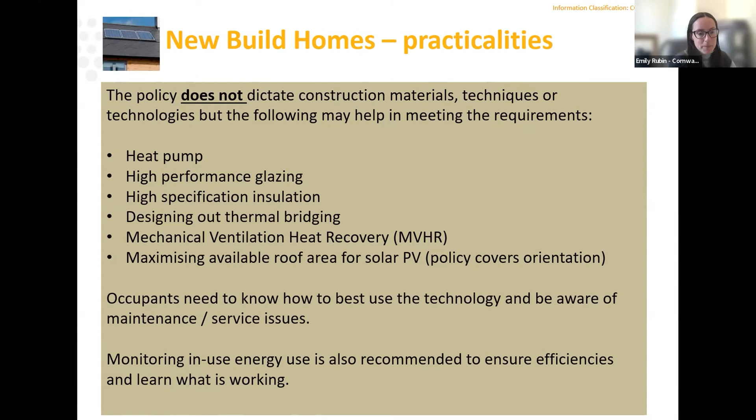So it's also really important that occupants know how to use the technology that they're given, and be aware of the maintenance and services issues there. And we also would really encourage monitoring the in-use energy, just to see what's working, and learn from that, and if there's any adjustments that can be made.

So just briefly touch on the non-residential requirement, and that is for larger developments to achieve BREEAM Excellent, which is a more flexible framework to cover all the different uses that could be caught up in that. So retrofitting, often planning permission isn't needed for adaptations to homes, but where it is, we will give significant weight to improvements where energy efficiency and reduction in carbon emissions are able to be made.

There is support for solar panels, especially where they minimise visual impact, especially to heritage assets and landscapes. And the policy also supports improvements to climate change resilience and sustainability of heritage assets, where they conserve or enhance the historical significance, and they facilitate the sensitive reuse where they're in disrepair. So that's really saying that these changes can really help the future of heritage assets. It's a positive thing.

So further requirements is also a not particularly onerous water demand threshold there for all new dwellings. We weren't able to have anything lower than that because we're not in an area of water stress. And then for large developments, some water efficiency measures as well there. And there's also provision for prioritising previously developed land and reusing existing buildings, and careful use of soil and resources, using locally distinctive materials which are resilient to Cornwall's climate, sort of granite and slate, things like that, as is appropriate to that area.

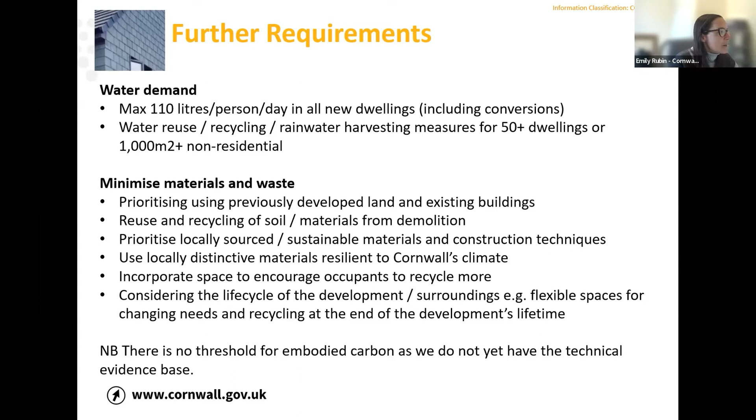So if you want to know more, some links I mentioned, we've got the climate change DPD link there. It's got the latest draft, it's got the evidence, and we'll have updates on the examination shortly. I've got the Cornwall Design Guide, which was adopted at the end of last year, and that sets out further details on our expectations. And it covers all sorts of things: inside buildings, outside buildings, public spaces, access.

Another imminent document is a plan for our places. This comes under the Prosperous Cornwall 2050 stream of work that we've got, and it's a very high level long-term strategy for the next 30 years. It does include the importance of energy efficiency, and this document's really going to set the tone for our next local plan, which we're starting to think about. It covers lots of different topics as well, so it relates to transport, economy, all sorts of things.

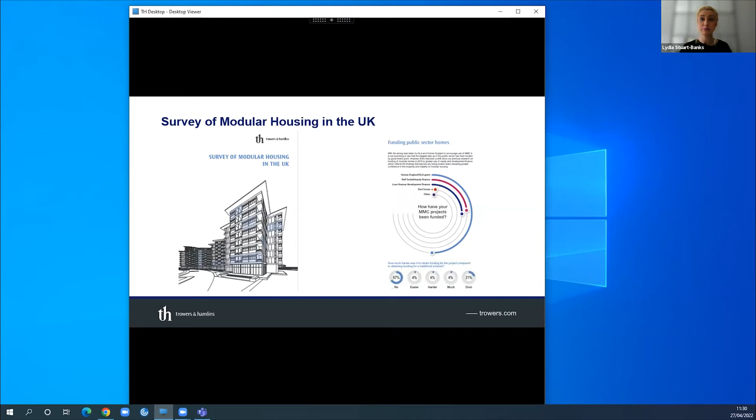And then in our latest report, which we published in March this year, we found that build quality and costs are among the key drivers across the public and private sectors. The need for less labour when building with volumetric and panelised systems was also a motivator. And that isn't a surprise given the construction industry is facing this skills and labour shortage. Equally, the argument for sustainable development and energy efficient homes is very high on the list as a driver for using MMC. So this undoubtedly reflects the increasing move towards and pressure for funders and developers to transition to net zero carbon. So our preliminary findings from our survey demonstrate an increasing appetite for using modular and demonstrated that parties across the housing sector are willing to consider innovative solutions to overcome some of the hurdles. But MMC is generally viewed more positively as an alternative to traditional build.

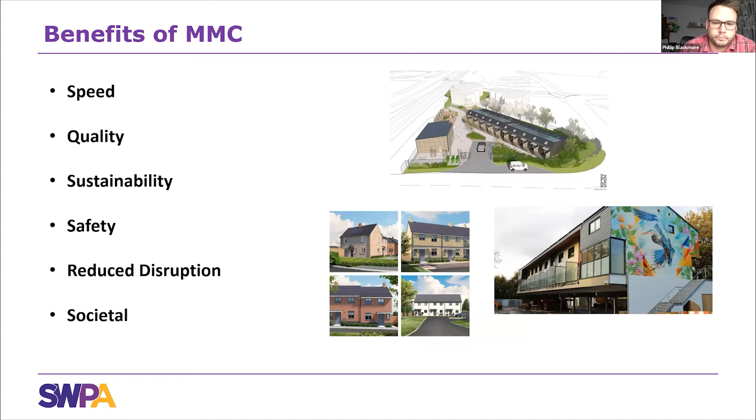So we're all aware of the most common perceived barriers to the adoption of MMC, including the perception of MMC being higher cost versus traditional, and the schemes having to be a certain size to make it viable, and also the uncertainty around quality of construction. It's also likely that public procurement in the UK has been a contributing factor to the blockage of MMC, so I'll just touch on some of those barriers now.

Supply chain resilience. So poor supply chain resilience can affect profitability and fundability of projects. In this regard, a fairly big barrier to the take-up of MMC is seen to relate to its lack of well-established supply chains. Recognising this was a major issue, back in 2017, I think, David Mosey developed and introduced the FAC1 Framework Alliance contract. The idea behind it is that it combines the features of a framework contract and an alliance contract to achieve a strategic and collaborative approach to procurement, connecting multiple projects, integrating team members, and improving value.

We believe that supply chain resilience starts from having a collaborative approach and focus on alliancing. And with the FAC1, this promotes an overarching theme which seeks to align objectives and interests. It promotes a joined up approach to achieving supply chain resilience.

Specifications. So legally, when drafting specifications for a preferred solution, the contracting authorities should not draft too narrowly or widely in order to rule out or unduly favour any potential workable solution which may meet its particular needs. So not knowing how to draft specifications for a new type of solution, or to draft them wide enough so as to not inadvertently discriminate against that new type of solution, may have been a barrier against the adoption of MMC in public procurement. The Construction Innovation Hub identified defining the need as one of the biggest obstacles to the growth of MMC solutions. This is now changing, with the creation of frameworks and dynamic purchasing systems which public bodies can opt into, and which effectively provide them with ready-made solutions.

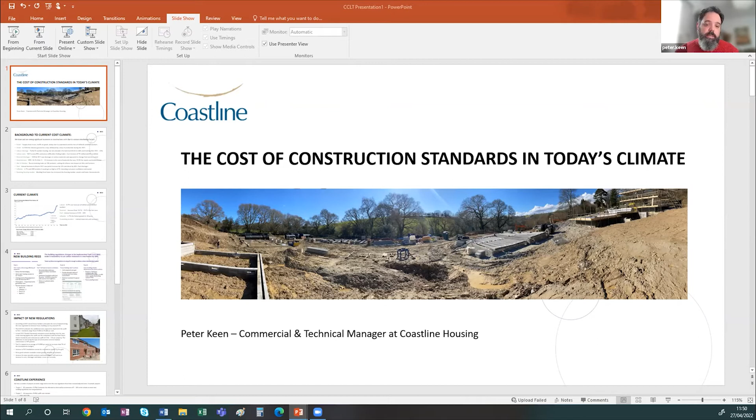You got the next slide? New building regs, does that come up? Yeah, sorry, yes, that's visible. Yeah. Sorry, my screen is different to yours. So no, that's right, new building regs.

We're on. Okay, so the building regulation changes that have been implemented from June this year make it mandatory to cut carbon emissions in new homes by 30%. And some people say, well, these are not going far enough. And I think it was opened up at the beginning that we are not going to be hitting this 1.5 degree increase at all. So we've got Part L, looking at energy efficiency in properties.

There's various different ways of doing that: thermal efficiency, so bridging, heating systems, etc., PVs, improving thermal U-values within the property. We've got Part F, which is looking at improving ventilation to reduce air pollution within properties. So using mechanical extract ventilation and MVHR, so heat recovery systems as well.

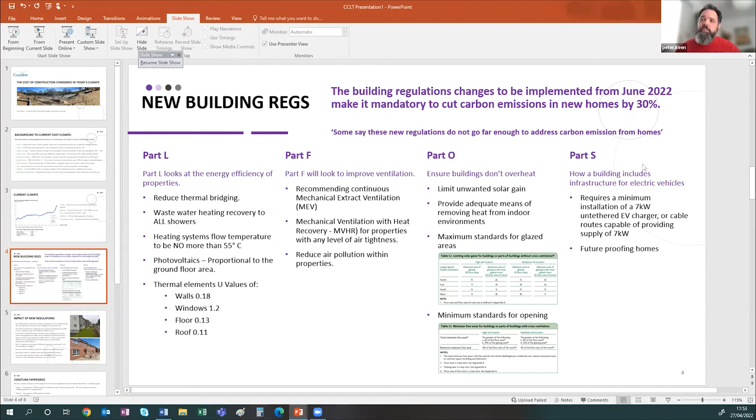Part O, ensuring we're not overheating. So getting rid of unwanted solar gain, how we can orientate properties better, standards for glazing, standards for openings as well. And then Part S as well, which is around infrastructure for electric vehicles, so requirements to have those installations within properties to future-proof.

Randall Simmonds, who we work with, did a review back in April 2021, and they were looking at the costs particularly around housing estates, so particularly what we do in terms of construction, and uplift costs to comply with new Future Homes Standards, etc. They estimate uplifts between £13,000 to £22,000 per property. The difference being the type of construction, so current modular construction versus SIPs panels, etc. Part S, so again, there's caps around that, but 3,600 per point.

We have noted, though, with regards to that, we have a site where it was discussed that electric vehicle charging points were to be installed in all properties. Now, that wasn't actually done in the end, but the grid came back and said, if everyone plugged their car in, we could not sustain it. And so the knock-on effects outside of whether the grid can provide that.

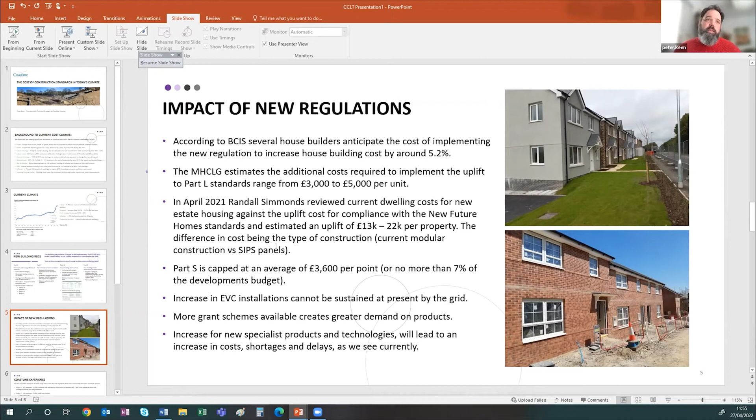There's more grants available, which is great, but also that creates demand. So people are wanting to upgrade their properties, and the increase in new specialist products and technologies, we have seen, leads to increased costs as well, shortages and delays on our projects. So just a couple of examples of our experience here.

So a number of projects we have at tender stage have now been reviewed because of the new regulations that are coming in. We've got one project there, which is 52 properties, 3.7 million. Contractors informed us that they're looking to increase the cost by 5 to 10% to meet the new building regulations, but this isn't guaranteed. They have said that could change depending on availability, demand, and the driving costs behind that, again, fuel availability, skills, etc.

With another project, 6.6 million, the uplift costs on those are a bit more specific around air source heat pumps. So 245k, underfloor heating; there's no point in really installing air source heat pumps unless you're doing underfloor heating with it. And then there's a whole load of works behind that to ensure that those lower emission energies are going to be more efficient within the property. We've got a smaller one, 25 properties, again, uplifts there. There's a review of ground source heat pumps, but also looking at PVs as well.

Another thing that we have opportunities to deal with is biodiversity net gain, and that's a requirement that we need at the planning permission stage to achieve 10%. The pressure we've seen is that it means we're building less homes per site, and also we're doing off-site contributions, so we're having to offset it because we can't meet that target. Again, that increases costs. I'm talking about money; I'm not saying these are bad things at all. These have financial impacts on us as house builders, and within our budgets as well.

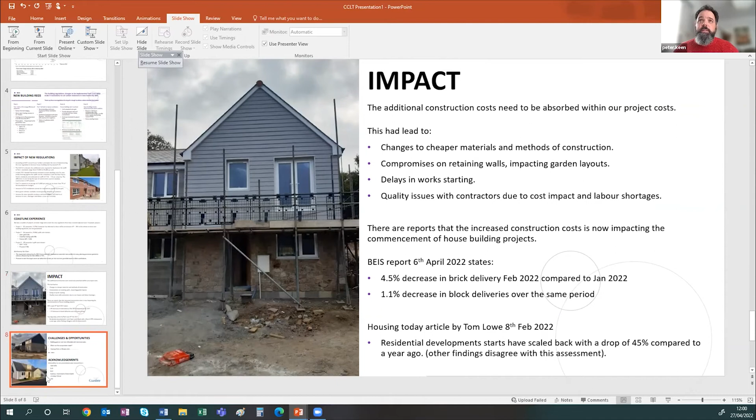And also there was an article just around residential developments, looking at some of the evidence that's coming out, scaling back, and they're seeing drops in sort of the start of projects. Now, other findings disagree with that, but that's certainly something we're aware of and we need to keep an eye on. And sort of finally, really, so these are challenges, but they're opportunities as well.

And building greener and more affordable with increased costs, we have to be a bit imaginative. We need help from all sectors. So it's great to hear about MMC. I think that's fantastic. Agree with that and want to work with that more. We need assistance from local authorities as well, planning groups, etc. So it's to help us in terms of what we're building and how we're building these, orientation of properties, etc., so we can really maximize PV.

We need to talk about and have conversations around where we make compromises in terms of construction and meeting. You know, we don't have a lot of choice around meeting regulations, but the type of properties we are constructing. And we have a housing crisis, but we also have a climate crisis at the same time. The two aren't mutually exclusive. And again, there's opportunities to address both and work together on both. There's some acknowledgements there at the bottom, but yeah.

No, thanks for that, Peter. That's really frank and honest, and really good to get a realistic view of what it's like on the front line of construction of affordable houses in Cornwall. I think lots of people will be nodding away in agreement with lots of the points you made. Again, if you could have a whiz through the chat just to see if there's any points you'd care to pick up on, I'd be grateful, because we're obviously running a little bit behind time again.

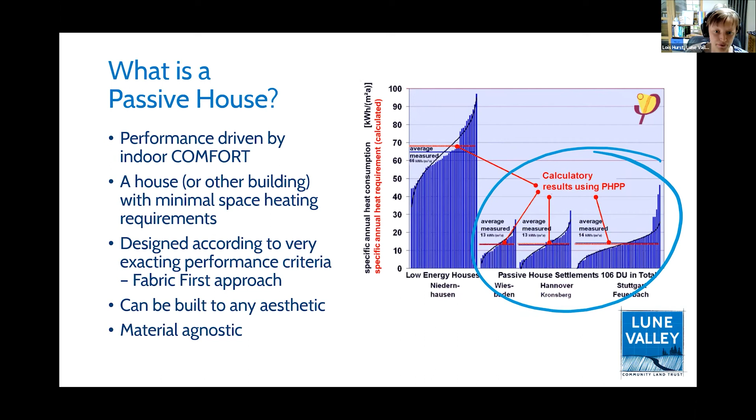So yeah, I'm going to go into a bit of detail about the things we need to consider when we're building passive house, and then relate them back to our experience with the Lune Valley CLT. So basically, we begin with optimized orientation and window sizing. South-facing glazing is best for solar gain in the winter, which corresponds to free heating, which is excellent. You have to be careful to avoid summer overheating, but south facing also provides us with the easiest opportunities to shade in the summer, which means we don't have to introduce energy consuming air conditioning.

We observe increased energy demand when we deviate from that south facing orientation. For example, if we have 30 degrees from south, then we see a 10% increase in energy demand, and it's actually up to 42% more if we orientate due east or west. And this is important. I'll come to this in a moment, but it doesn't mean that all passive houses have to face south. The other consideration is the window sizing.

Typically, we'd expect passive houses to have about 15% glazed area, which is apparently not uncommon in conventional buildings. But we're putting those windows, like I said, carefully orientated to gain the most solar gain. And then we have shading as well. We also want to be considerate to landscape shading and other buildings, etc.

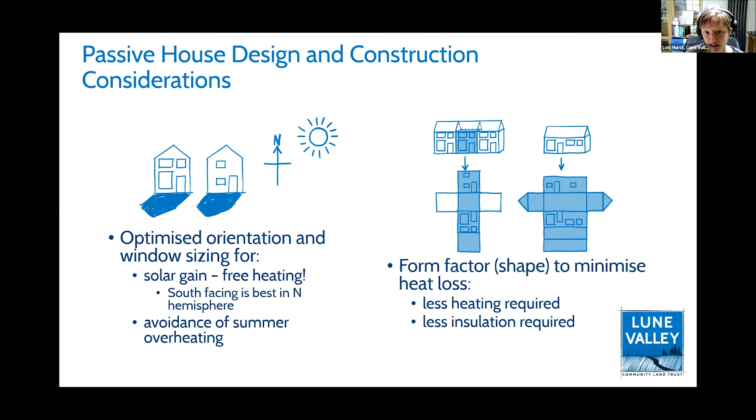Then on the right-hand side of this slide, we've got the form factor. So the shape of the building can make a tremendous difference to how much energy it consumes. You can see the example here is a terrace versus a bungalow. Basically, it's the amount of surface area that you have to the amount of treated floor area or thermal envelope that is functional space. Terraces are cheaper to build because there are fewer walls per house. You get shared walls between the houses, etc. So there are multiple benefits to giving good consideration to your form factor when you start off with your design.

Again, this was another constraint of the specification. The community were involved in deciding how we wanted these homes to look, and we decided that having a pedestrian street which ran between the homes made for a really nice community feature. So the homes don't face south, but we are still on track to meet the passive house standard in spite of that. So it's best to face south, but it's not imperative.

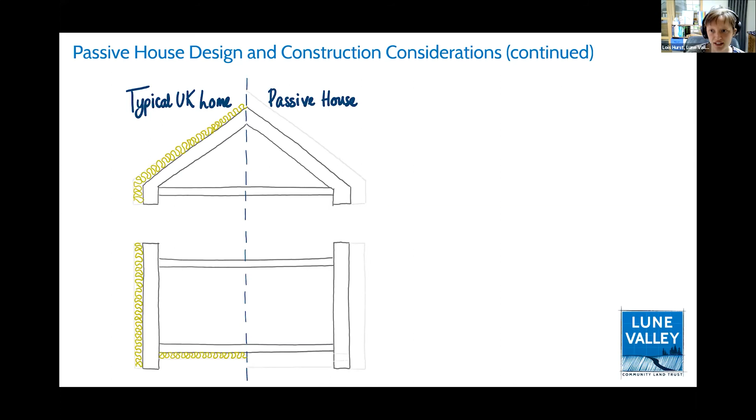So then other considerations. Obviously, passive houses have thick insulation. The insulation thickness is determined by calculation looking at a whole house model. And also we have no thermal bridges, which are designed out before we go to site. So thermal bridges are thin spots or gaps in the insulation which allow heat to escape. And we can mitigate this quite readily by using specialist materials to break that thermal bridge.

Then we move on to glazing. So as previously mentioned, passive houses have triple glazed windows. In the UK, this isn't always required in warmer climates. But these are specified to meet the internal radiant temperature criteria, and this is a really important feature of the comfort. So internal radiant temperature on your windows means you won't feel cold drafts coming off the windows. And it also avoids condensation forming, so we don't get any of the internal condensation.

The positioning of the windows is important. These go inside the insulation layer to avoid thermal bridging around the frame. And then we also move on to including very rigorous air tightness, which we've already heard about. It ensures that the warm air isn't lost through the building fabric, so we're not losing energy and therefore needing to provide more heat. But it also is really important in protecting the building fabric from moisture, which someone else mentioned is a problem in the Cornish climate, as it is here up in Lancashire.

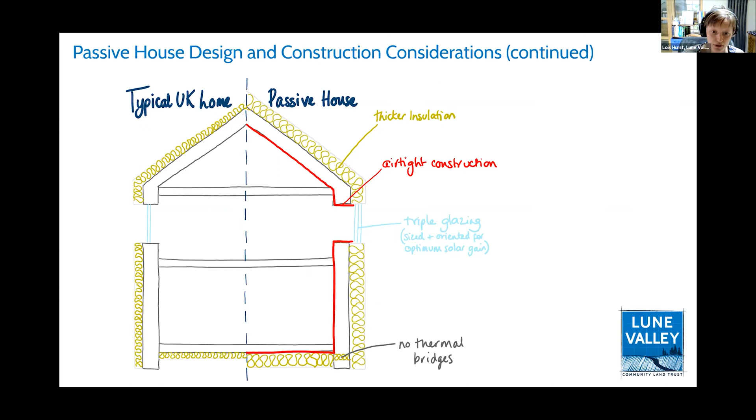So, sorry, that's not the right thing.

So this is just a picture. You'll have all seen pictures a bit like this. It's a timber frame building. The difference here is that the insulation is thicker. We've considered air tightness right through from the construction detailing to implementation. And there's just a headline specification of the products and features we've installed. So we've got a cold roof, we've got an external wall insulation cladding system. Rationel have provided triple glazed windows, and we've just passed our first air pressure test at 0.54, which was within the 0.6 limit.

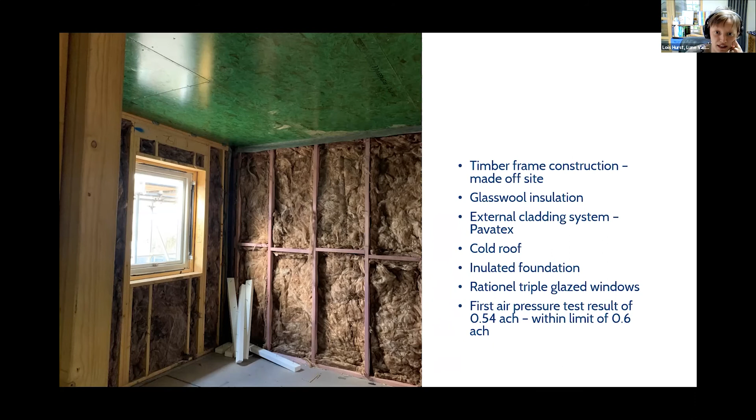So is it affordable? That's the big question. Answer is yes. We've got a higher quality building, we've got better living conditions and comfort, and we've got fewer health complaints amongst occupants. So these are unquantifiable factors in many respects. And so how do you frame that amongst cost?

But if we consider the life cycle, then it becomes significantly cheaper to go for passive house. So we can do affordable homes at very high quality with very good living conditions and internal comfort. So there we go. And I think that's it for me.

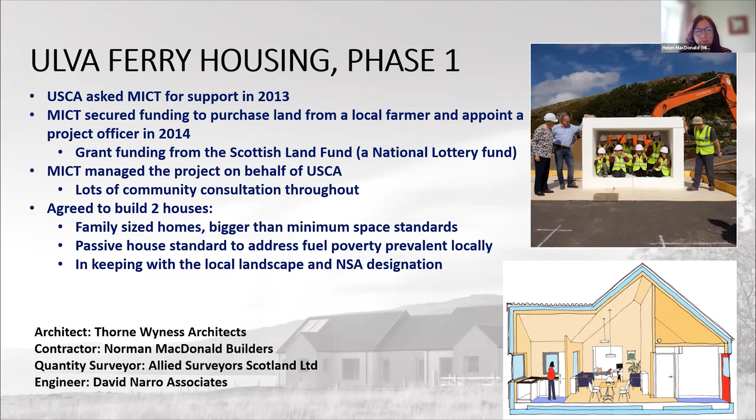Fast forward 3 years and 2 passive house standard 3-bedroom family homes were completed in June 2017. We used a local architect, Thorne Wyness Architects, who are passive house certified, and a local builder. We had a really complex funding package, including local authority and Scottish Government funding, grants from Quaker Housing Trust and Trust House Charitable Foundation, a mortgage from Triodos Bank, and additional loan funding from Quaker Housing Trust as well. We also ran a really high-profile crowdfunding campaign, which received over £60,000 in donations.

It was difficult to convince funders at the time of the benefits of passive house construction, that there was any housing need at all in the area, and why houses should be built out with a main settlement. At the time, there were few communities actually delivering housing themselves, and the comparison was with social housing, which was very much geared towards volume building, as close to benchmark as possible, and not prioritising quality or sustainability, or looking at the longer term life cycle costs of homes.

So a benchmark means absolutely nothing when you're building on an island. Our quantity surveyor confirmed that our build costs were 25% higher than an equivalent built in the central belt of Scotland due to additional ferry, infrastructure and labour costs. However, we were undeterred and determined to stick to the community's brief to build high quality houses, and eventually we secured the funding we needed.

The houses were constructed using a cross-laminated timber frame, which enabled a short construction period and excellent airtightness, and all building materials were recyclable. The houses are light and airy and have significant solar gain from the large triple glazed windows. And with a mechanical ventilation heat recovery system, the only heating source is from a towel rail in the bathroom. So these were the first passive house standard community-owned housing in Scotland. However, at the time we couldn't afford to go through the certification process, so we lost out on the actual accolade to a really good housing development in the south of Scotland.

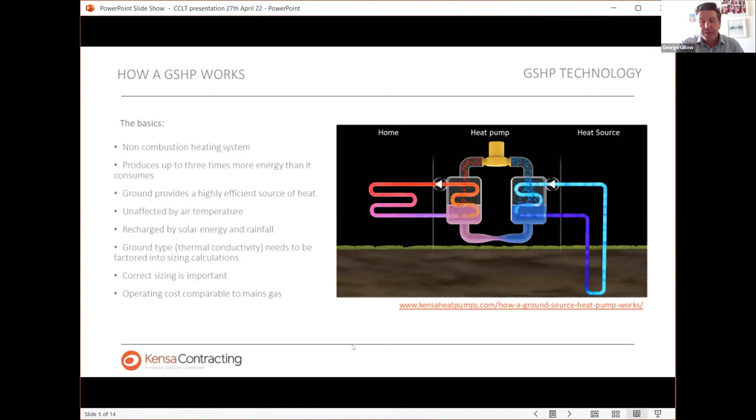So that's where it transfers the heat energy on the left-hand side of that diagram into your home. Once it's taken the heat energy out of the refrigerant circuit, it turns it back into a liquid, back through a decompression valve, and then it will start the system again and take more heat from the ground. Okay, so that's pretty much a very basic start to how the heat pump works.

The majority of the heat pumps we sell are these shoebox heat pumps. This is a picture of the 3 kilowatt shoebox. This is what we use mostly for flats and small housing in the new build market. We have one which is slightly bigger for a 6 kilowatt heat pump. The 3 kilowatt is the smallest and quietest heat pump on the market, and will quite happily fit in an airing cupboard, which is around about 800 millimeters square by a 2.4 meter ceiling, and you can get a hot water cylinder above that heat pump.

Have to remember, when you're using heat pumps at the moment, you do require a hot water cylinder as well as your heat pump. So for the new build market, your 3 kilowatt heat pump for flats and small houses. For slightly bigger houses, you would have a 6 kilowatt heat pump. And then for your retrofit housing and larger new build development, you'd be looking at 6 kilowatt or the slightly larger Evo series. We also do commercial heat pumps, but that's not really what we're talking about today.

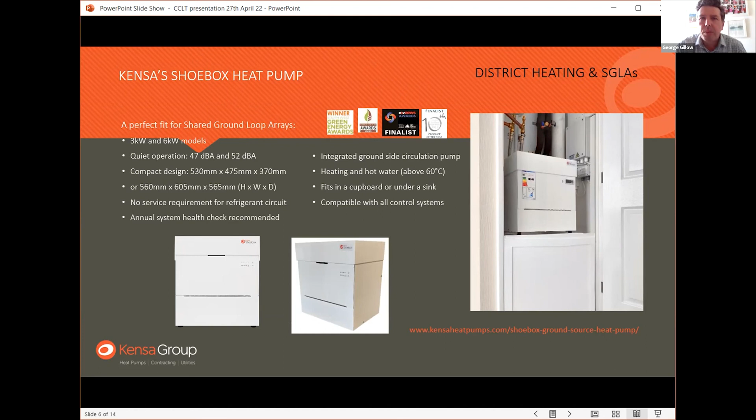So heat pumps, as we spoke about earlier, come in 2 different sorts, really, the air source and ground source heat pumps. As we move into the new building regs after June, all new houses will be required to have a flow temperature of 55 degrees or less. So basically, you're going to need to use a heat pump to be compliant. So you can look at using either an air source or a ground source heat pump. So why would you use a ground source heat pump? Well, here are some of the benefits.

It is more efficient because it uses the temperature from the ground rather than just from the air. If you are using an air source heat pump to heat your house through the winter periods, obviously the air temperature is a lot colder than the ground temperature. The ground temperature is pretty much constant throughout the year. Because of its greater efficiency, it then has lower carbon emissions and lower running costs. And there's also a much greater opportunity to use your heat pump in the middle of the night.

So if you imagine you had a development with a lot of apartments or high density developments, if you've got a lot of air source heat pumps all running at once attached to their backyards, there's going to be increased chance of noise. So not really suitable to run them in the middle of the night. When you're running a heat pump in the middle of the night, it means you can take advantage of very low carbon and very low cost electricity. This can be seen at the moment. Octopus EV tariffs are offering 7.5 pence per kilowatt hour for electricity for a 4-hour period in the middle of the night.